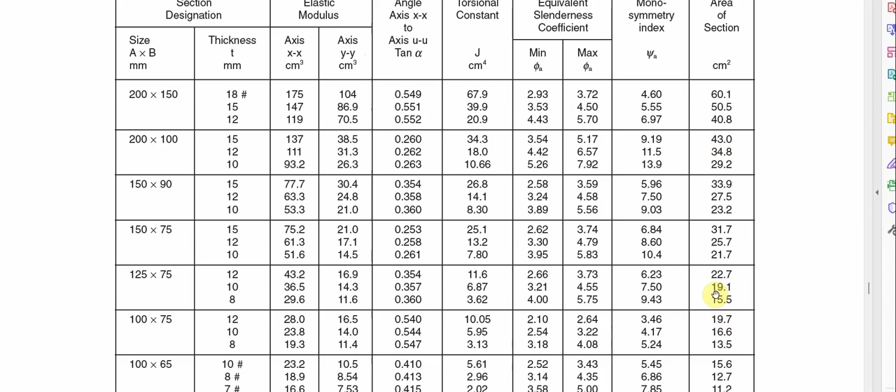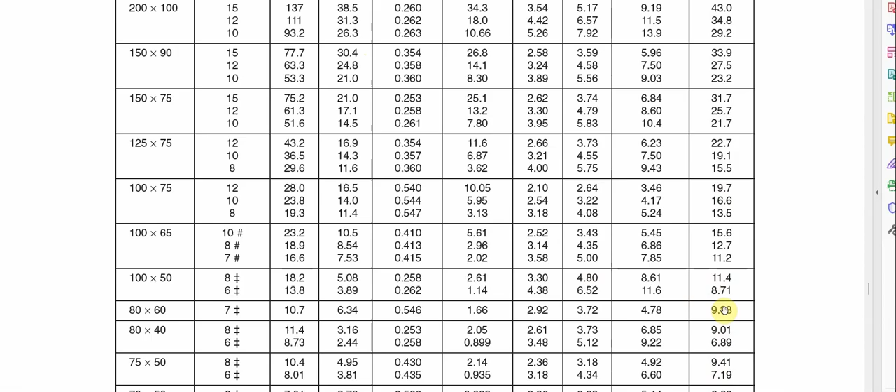So under our steel table, on unequal angle, this is the area of the sections, and we have 7.33 there. For this particular calculation, I'm taking this particular one, 9.38. I don't want to be so economical and be going for maybe 7.1. I think this one is okay for me. I'm going for this one, this 9.38. And if you look at it, it is area of section, and we are dealing with unequal angle.

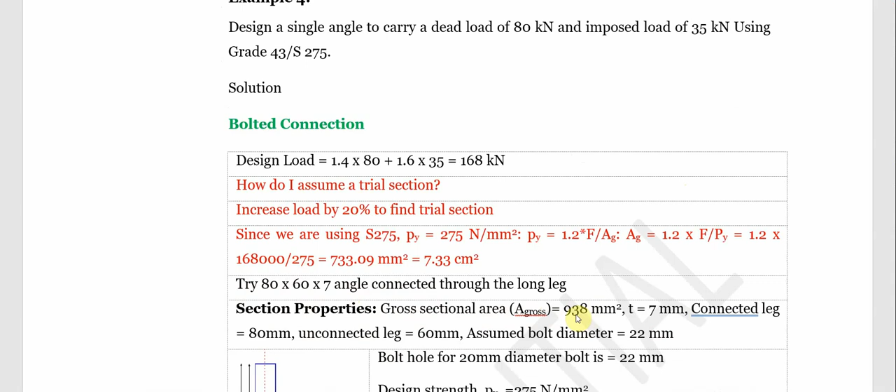So having done that, we go to the next phase; this is the section we are trying now. We are taking the gross area to be 938, because we have 9.38 centimeter square, which should be 938 millimeter square. The bolts that we want to use, let's say 20 mm diameter bolt, and if we take the tolerance, the hole will be 22 millimeter to allow the bolt to enter easily.

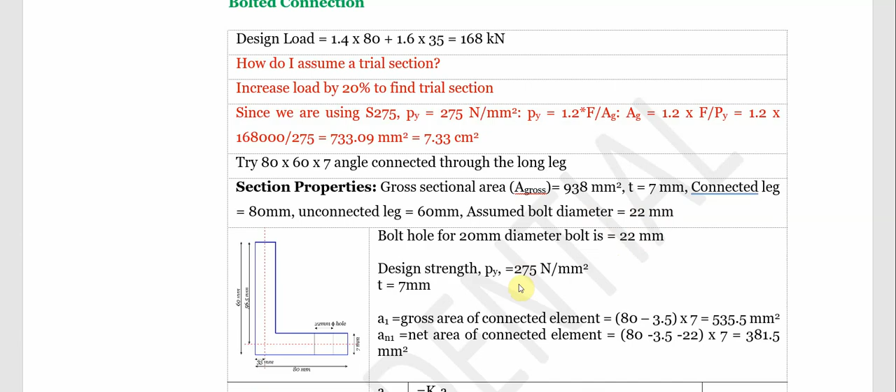So we calculate the gross area of our connected element, which is equal to 80 minus 3.5, since this is the portion we want to calculate, 80 minus 3.5 times 7. So that's the cross sectional area of this particular place. But we need to remove the hole. So to get the an1, the net area of connected elements, we'll deduct the hole from it. Then we have this as the net area of the connected element.

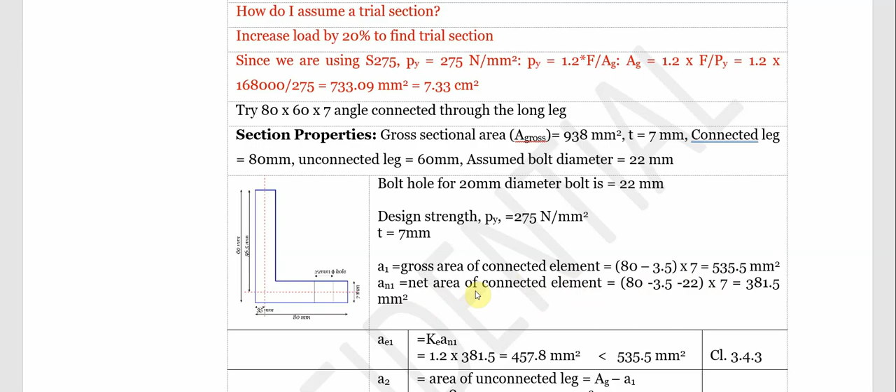Having done this, we'll now calculate this KE. This KE is gotten from BS5950; when our steel grade is S275, its KE is 1.2. So this 1.2 we multiply with this, and we have this value. Then this value is tested with our gross area of connected element; it has to be less than this.

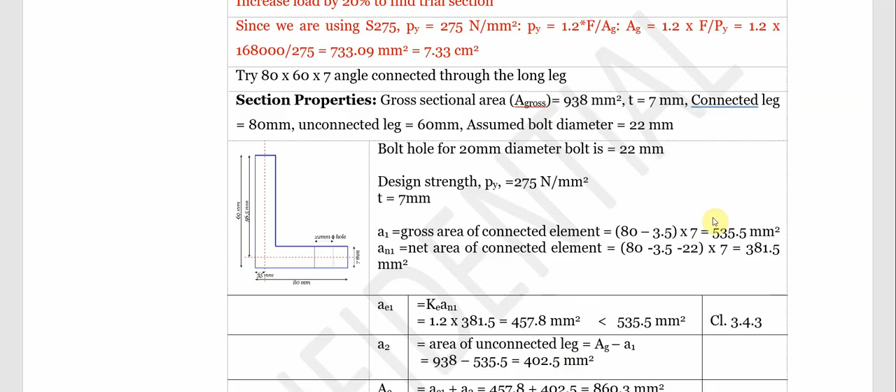If that is satisfied, then we go to the area of the unconnected leg, which is this area. This we got from the steel table minus our area of connected element. So having done that, we just deduct this, then we have 402.5. Then the next thing is we calculate our AE, which is the summation of this plus this, and we have it as 860.

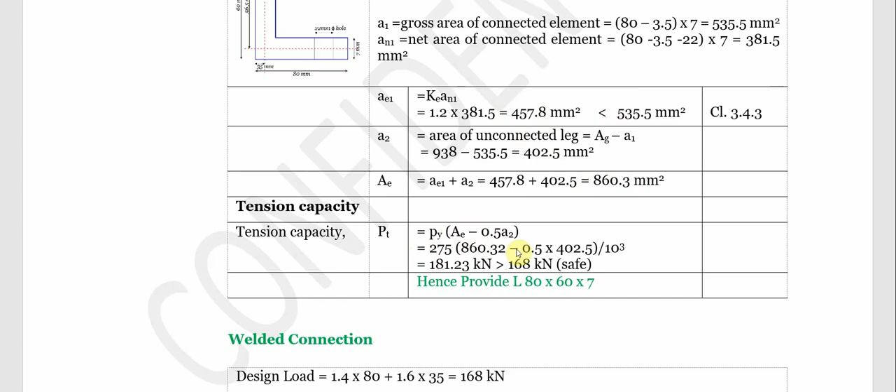Then we calculate our tensile capacity, which is PY times AE minus 0.5A2. This is in your BS5950. So we take the value out, then we take the A2, we have it here, we put the value there, then we check. Since this one is greater than our design load of 168, it is safe.

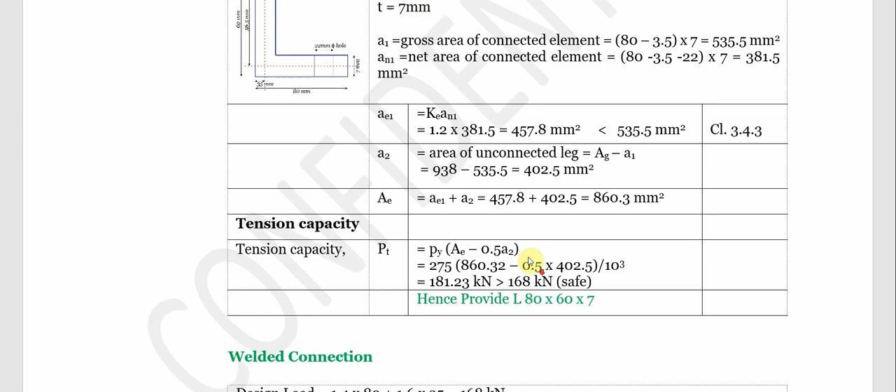And under welded connection, since there's no bolt hole, we just look at the gross area, then we calculate the area of connected elements; let's say this is where we are connecting the element, we just remove half of the thickness, then we multiply. So we are getting the area of this portion here. The next thing is area of unconnected leg, which is 60 minus, sorry, we can just remove this one from this, then we get the area of unconnected leg, which is 402.5.

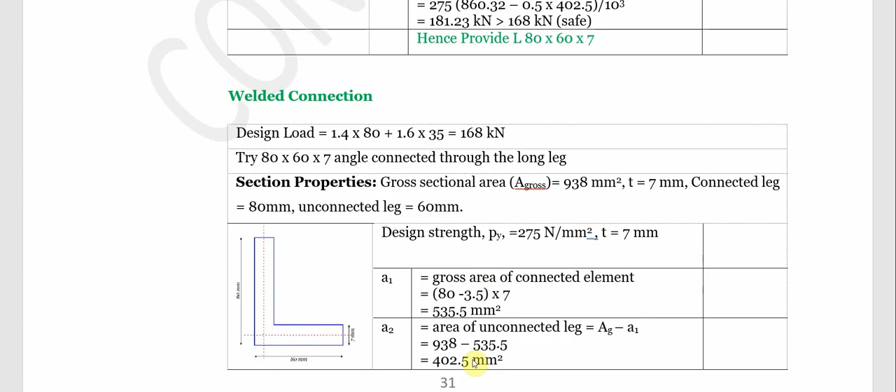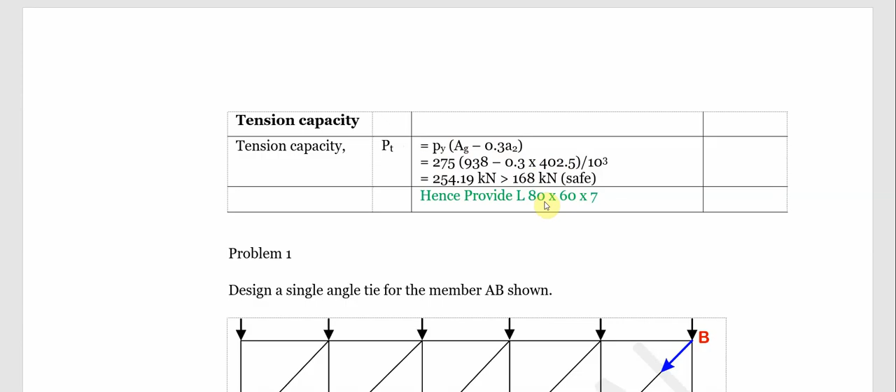Then we calculate our tension capacity, which is AG minus 0.3A2. Mind you, our AG is the cross sectional area, which is 938 minus 0.3 times 402.5. We have it as 254 kilonewton, which is greater than 168 kilonewton. That means the structure is safe. What it means, from our observation, is that a welded connection is able to carry more than a bolted connection.